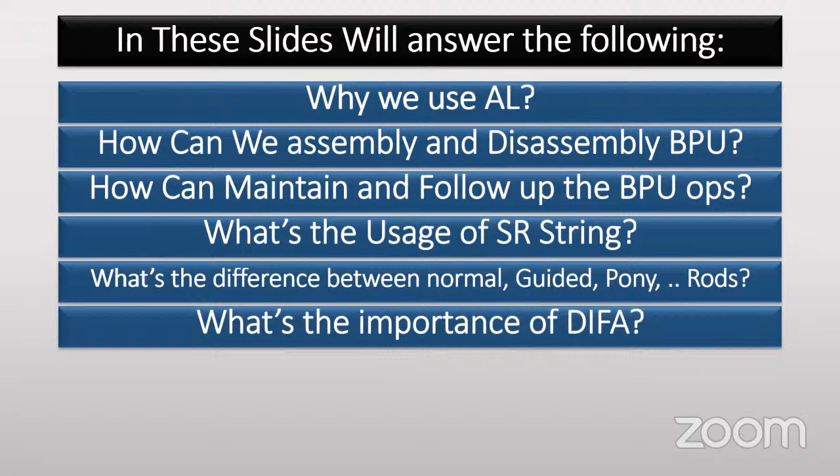These slides will answer the following questions: why we use artificial lift; how can we assemble and disassemble a beam pumping unit; how can we maintain and follow up beam pumping unit operation; what is the usage of sucker rod string; what is the difference between normal, guided, and any other type of rods; what is the importance of DIFA done on downhole pump in the workshop; how can we design a sucker rod system; and how can we optimize our production by sucker rod system.

The first question: why we use artificial lift? As we know, we need to first know the types of oil wells. The first type is self-flow wells. This well has the capability of flowing naturally from reservoir till surface facilities because these wells have a high reservoir pressure. The second type is non-self-flow wells, which cannot flow naturally because of low reservoir pressure or depleted well.

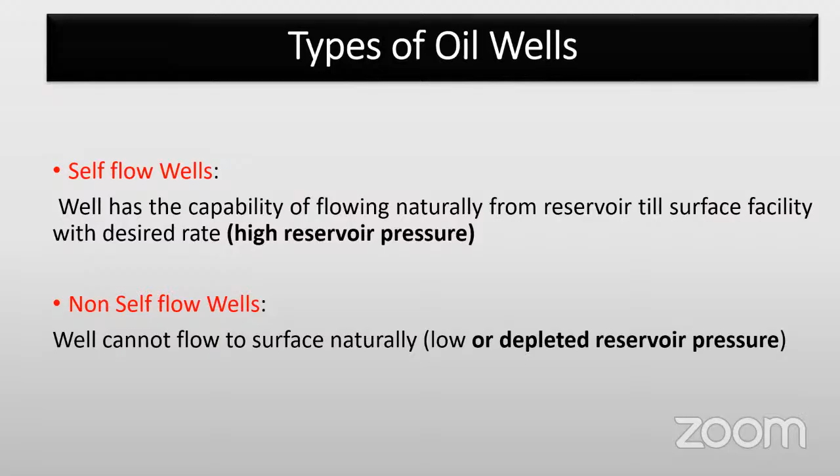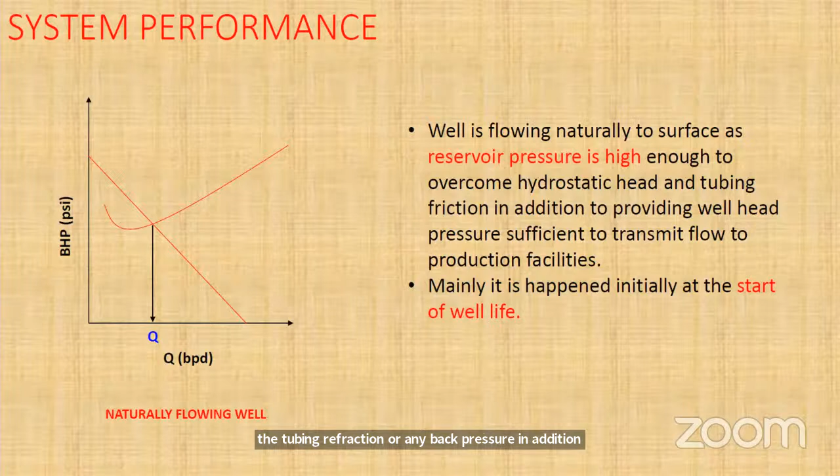As we know, the intersection between vertical lift performance and the IPR means the naturally flowing well. This well can flow naturally at this flow rate at this bottom hole flowing pressure. This will flow naturally to surface as the reservoir pressure is very high enough to overcome hydrostatic head and tubing friction or any back pressure, in addition to providing us with well head pressure. This well head pressure has to be sufficient to transmit the flow to production facilities.

This mainly happens initially at the start of well life, but after time, the well which is producing naturally will lose that intersection and become a dead well.

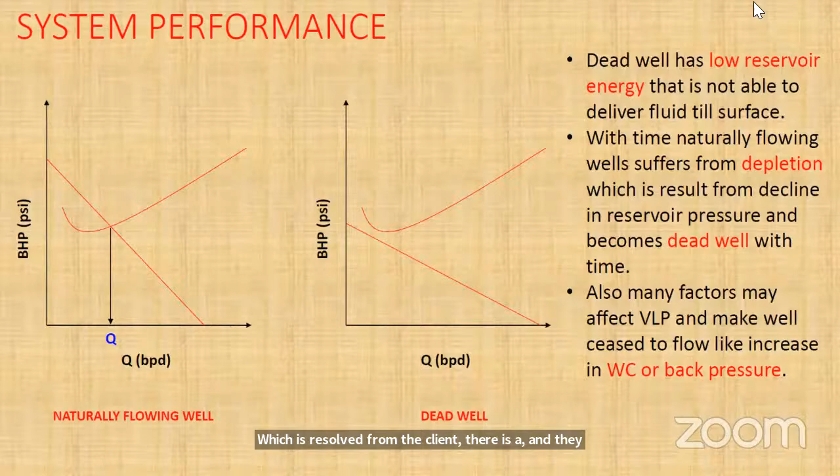This dead well has low reservoir energy that is not able to deliver fluid to surface. With time, naturally flowing wells suffer from depletion, which results from decline in reservoir pressure, and become dead wells. How can we retrieve this dead well to flowing well again?

The first thing is to enhance or support the reservoir pressure and improve the IPR. How can we support the reservoir pressure? By injection, any type of injection: water injection, PWRI, gas injection. The objective of all these types of injection is to support the reservoir pressure.

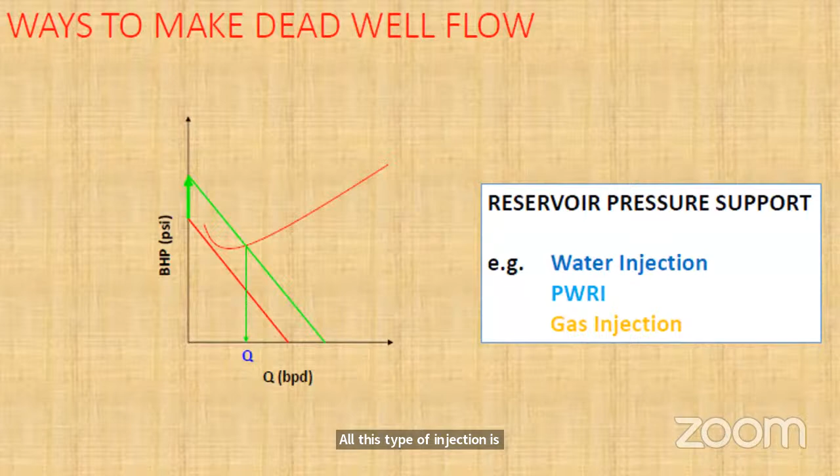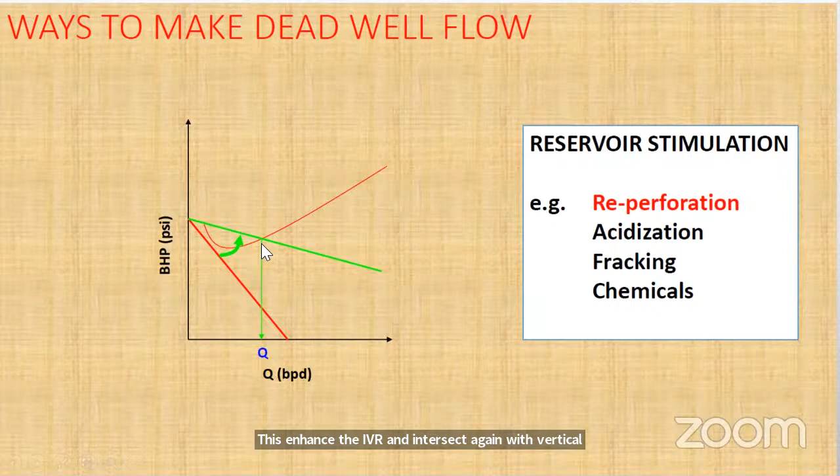We can make reservoir stimulation to enhance the IPR so it intersects again with the vertical lift performance. How can we make reservoir stimulation? By reperforation, acidization, fracking, or any type of chemical injection. This enhances the IPR and intersects it again with vertical lift performance, so this well can flow naturally again at this flowing rate and bottom hole pressure.

But if we enhance the IPR and still the intersection between IPR and vertical lift performance is not achieved, what do we do? We force it by using artificial lift - any type, like gas lift, ESP, sucker rod, jet pump - which will bring the intersection again between vertical lift performance and the IPR. This intersection means the well will produce again.

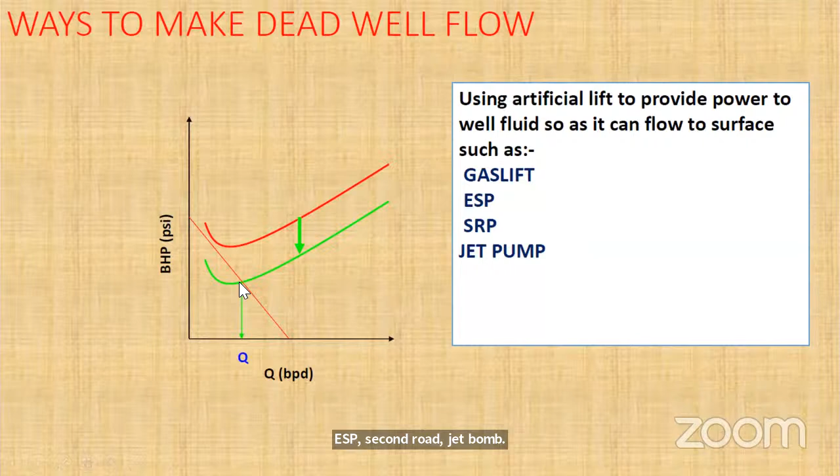What is the objective of artificial lift? The main objective is to apply drawdown to give the fluid energy to overcome hydrostatic head and tubing friction, and give us flowing pressure at the surface. This pressure will transmit the fluid to the process facilities.

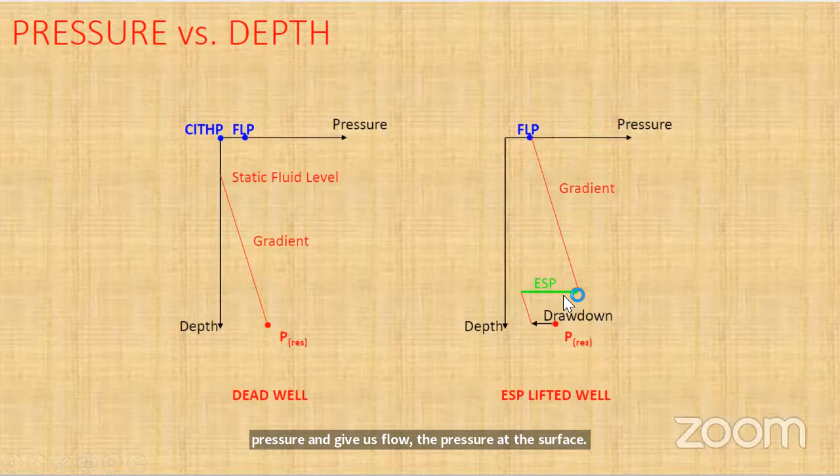Here, the reservoir pressure is very low, giving us a static fluid level, and the fluid stops at this point. So we need energy to overcome this pressure and give us flowing pressure at the surface. The artificial lift creates drawdown and supports the fluid with energy, which overcomes the hydrostatic head and tubing friction, giving us flowing pressure.

Now we answered the first question, why we use artificial lift. The second question: how can we assemble and disassemble a beam pumping unit? This will be discussed in detail during the course, but I will give you an overview of how we can assemble and disassemble a beam pumping unit.

First, we have to know the parts of the beam pumping unit. What is the main part? The main part is the concrete base, then the steel base of the beam pumping unit, which assembles all parts above this unit base. This is the prime mover.

The prime mover is the source of rotational movement, which is transmitted to the gearbox by V-belts. These V-belts and the prime mover generate the rotational movement. Then this movement transmits to the crank arm and the Pitman arm. The crank arm and Pitman arm are attached together with the crank pin. These two arms are responsible for transferring the rotational movement into up and down strokes.

Attached here is the equalizer. This equalizer attaches with the walking beam by the equalizer bearing. Here is the center bearing, which attaches with the walking beam to transfer this up and down stroke to the downhole equipment. This is called the Samson post with 3 legs.

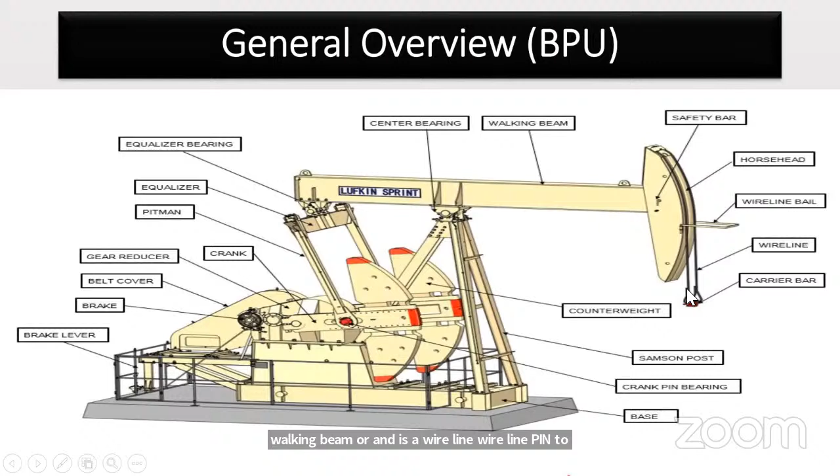This walking beam, horse head, and wireline bail attach to the carrier bar, which loads the sucker rod string on the carrier bar. So these are the main parts of the beam pumping unit, which will be assembled.

How can we assemble the beam pumping unit? What is the main objective of the beam pumping unit? It is responsible for transferring the rotational movement into up and down stroke to produce the pump. The pump needs up and down movement to produce. So this is the source of the up and down stroke.

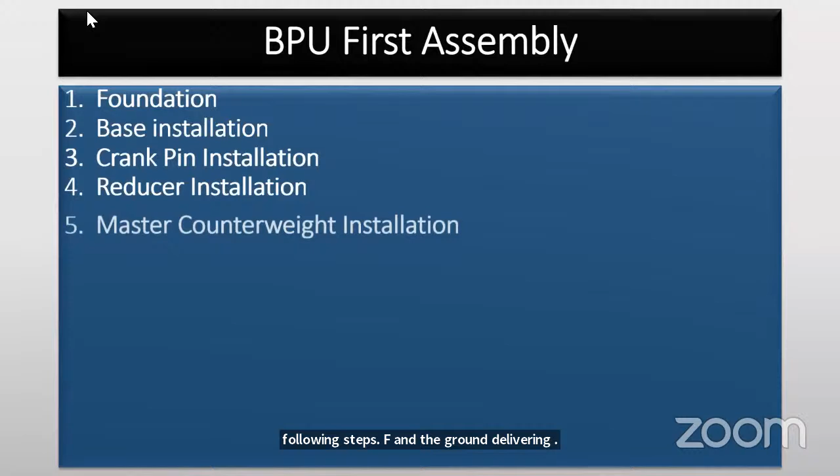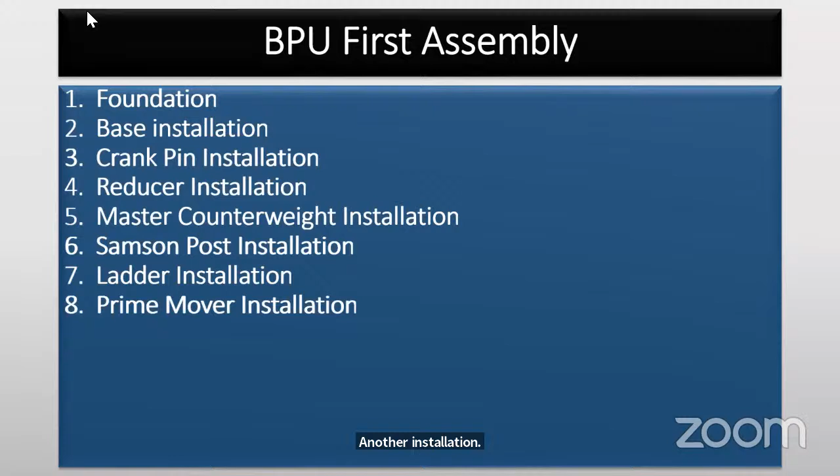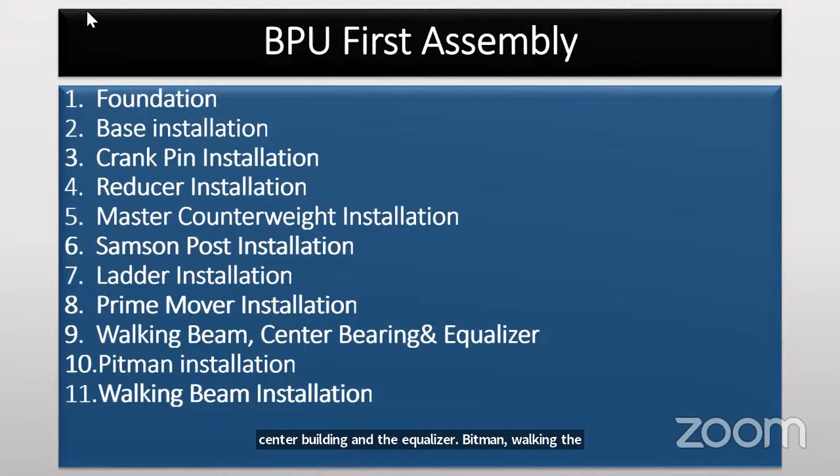Beam pumping assembly will be done in the following steps: foundation and ground leveling, base installation, crank pin installation, reducer installation, master counterweight installation, Samson post installation, ladder installation, prime mover installation, walking beam center bearing and equalizer installation, Pitman installation, the whole walking beam equipped with horse head, center bearing and equalizer bearing, horse head installation, and finally crank guard installation for safety.

This is the complete assembly for the beam pumping unit, which will be discussed in detail during the course - how we can assemble it from A to Z.

The third question: how can we maintain and follow up the beam pumping unit during operation? The maintenance and follow-up for beam pumping unit is classified into 3 major steps. The first one is daily, monthly, and every 6 months, depending on the most important 3 words: look, listen, and apply.

We will begin with daily. Look at the unit on a daily basis to observe any change in the unit alignment, any wireline tracking, or anything else changing during the last 24 hours. Listen - we have to really listen for any noise from the gearbox or structure bearing: rumbling, popping, clicking.

Any noise from the beam pumping unit is an indication of beam pumping unit failure. Apply the brake slowly but firmly to assure it is in good working condition. This is for safety, because if we want to make any maintenance for the beam pumping unit, we will use the brake.

Monthly, we repeat the most important words: look, listen, and apply, which is done daily, and check the oil level in the gearbox to ensure it is at the proper operational level. Review all bolt conditions visually.

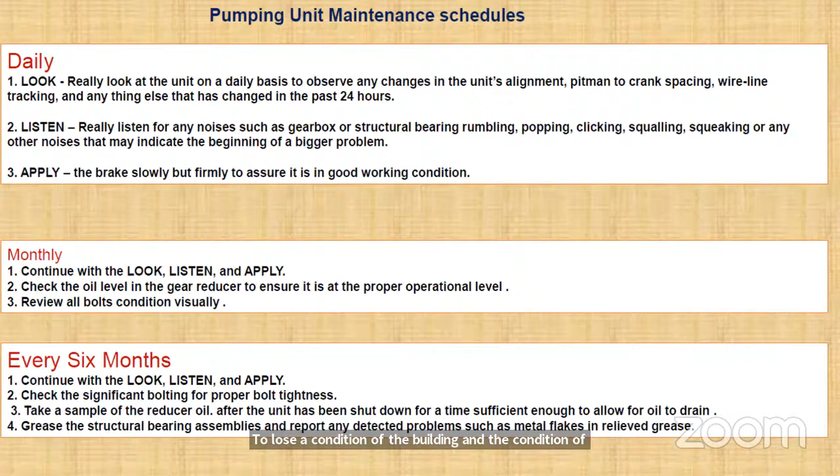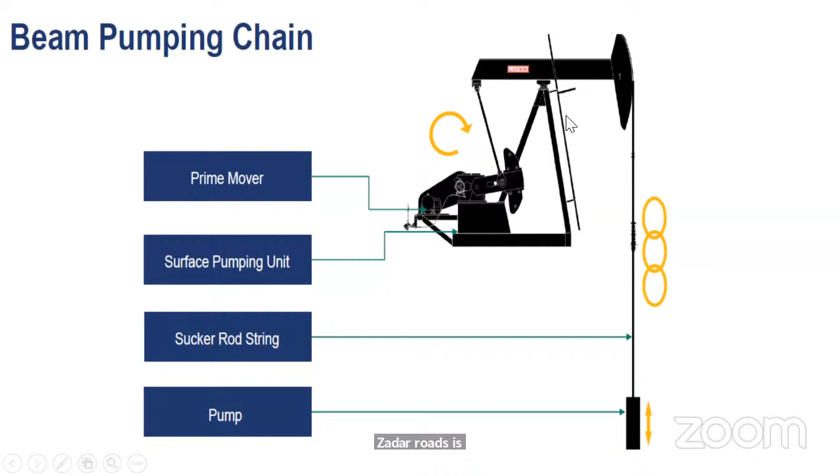Why do we use the sucker rod string? As I said before, this pump needs up and down stroke to produce. The up and down stroke is generated from the beam pumping unit at surface. The sucker rods are responsible for transmitting this up and down stroke from the beam pumping unit at surface to the downhole pump downhole. This is the figure or shape of the sucker rod. This part is responsible for transmitting the energy from the beam pumping unit to the downhole pump, acting as the chain between the beam pumping unit at surface and the downhole pump downhole.

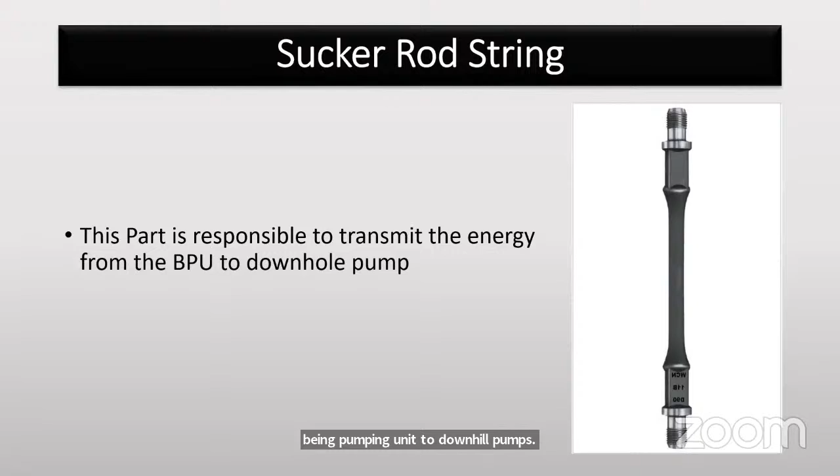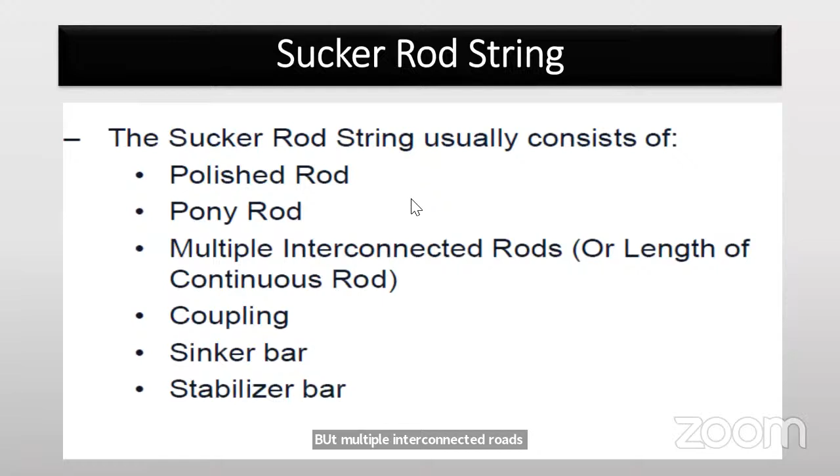The sucker rod string consists of the following, from surface to downhole: polished rod, pony rod, multiple interconnected rods, coupling, sinker bar, stabilizer bar, and at the end, the downhole pump.

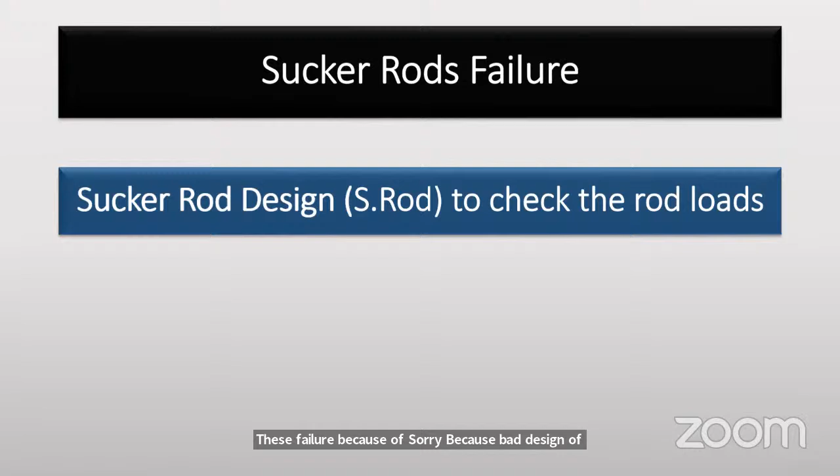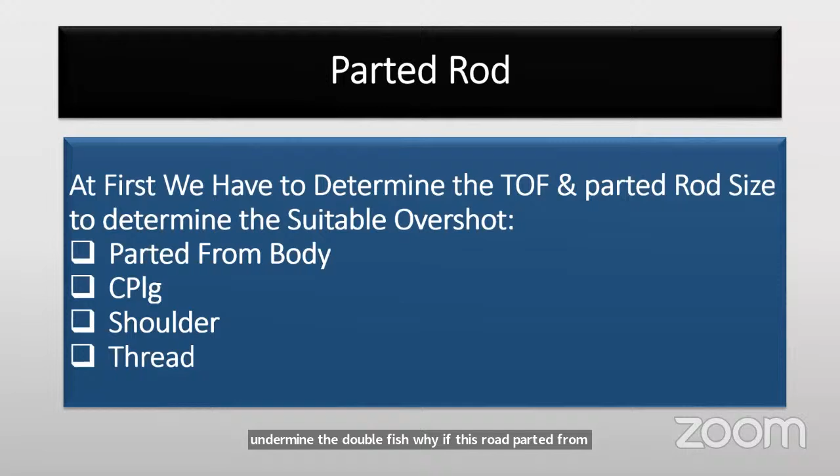Sucker rod failure will also be discussed during the course, which occurs during operation. This failure is because of bad design of the sucker rod, in terms of checking the rod loads. The most common failure is rod parting. When a rod is parted, we first have to determine the top of fish, because we need to determine the parted rod size to determine the top of fish - whether this rod parted from the body, from the coupling, from the thread, or shoulder - to determine the suitable overshot.

Sucker rod care and handling will be discussed in detail during the course, because it affects the lifetime of the sucker rod and is the main cause of rod failure.

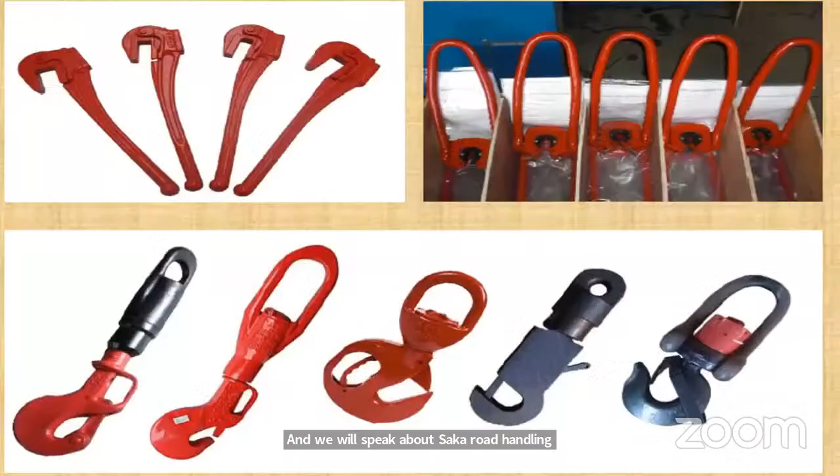We will also speak about sucker rod handling tools. These handling tools are API standard handling tools which will be used during running in hole or pulling out of hole with sucker rods. They have to be as per standard to prevent any failure of the sucker rods.

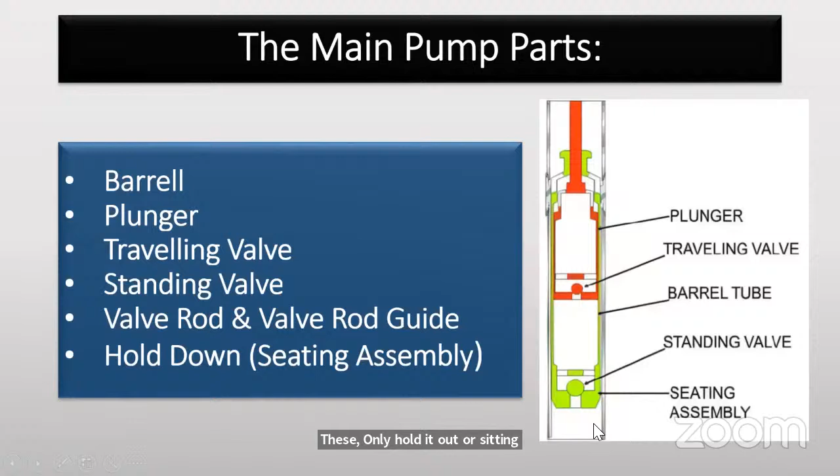Downhole pump. The main parts of the downhole pump are the barrel. This barrel is attached at the end with the standing valve, and the traveling valve which is attached with the plunger, responsible for transferring the oil from the barrel to the tubing. This is called the traveling valve, and this is called the standing valve. This valve rod, hold down, or seating assembly is responsible for holding the pump inside the tubing.

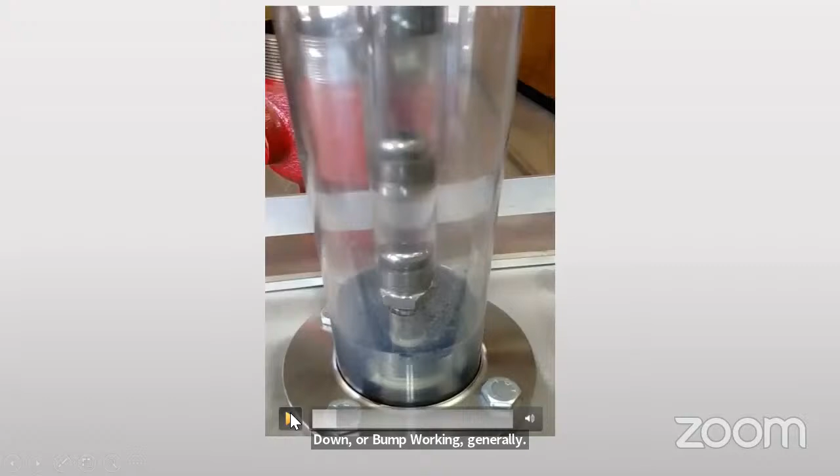This video will show us how the downhole pump, or sucker rod downhole pump, works generally - first in the upstroke, then the downstroke. In the downstroke, as shown here, the traveling valve is in the open position and the standing valve is in the closed position, to transfer the fluid from the barrel to the plunger. But in the upstroke, the opposite happens: the standing valve is in the open position and the traveling valve is in the closed position. This open position transfers the oil or fluid from downhole into the barrel. This action is repeated to produce via the downhole pump.

I think it's clear now how the downhole pump is working.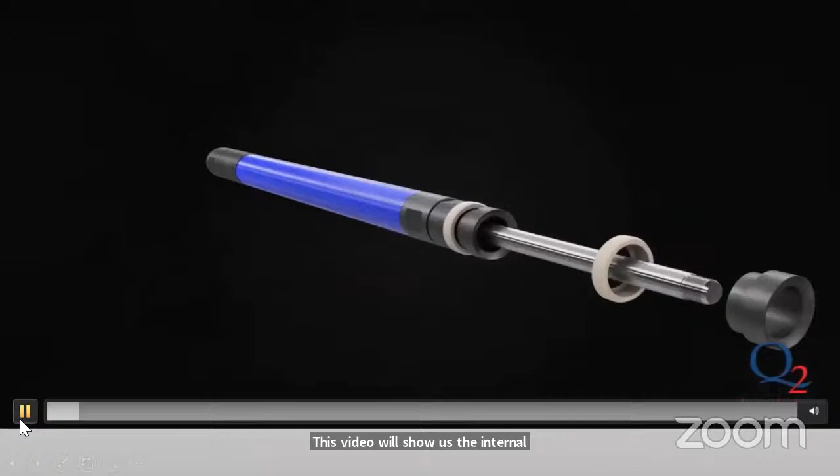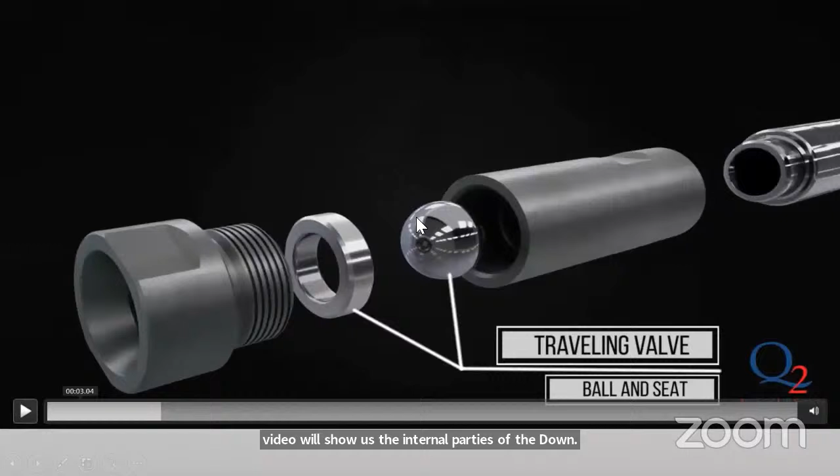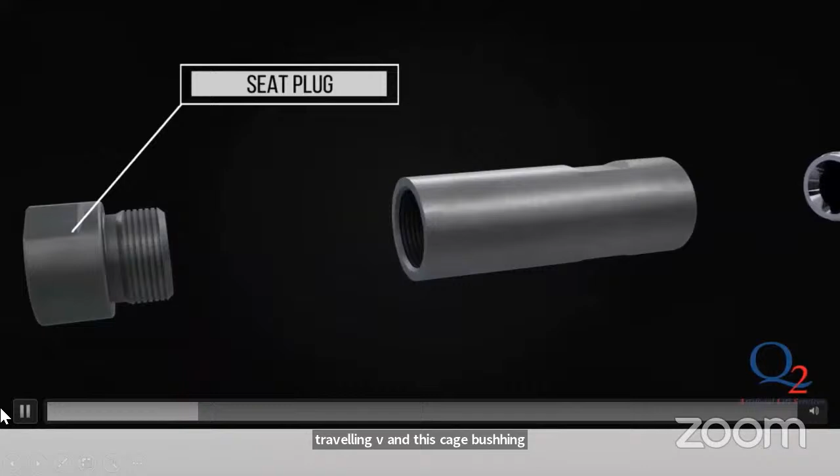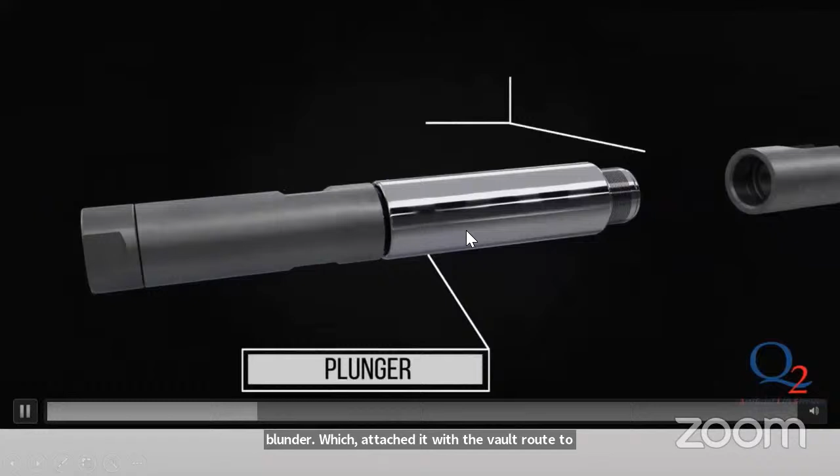This video will show us the internal parts of the downhole pump. This is called the traveling valve, and this is the ball and seat of the traveling valve. This is called the cage of the traveling valve, and this is the cage bushing. The traveling valve is normally attached to the plunger, which is attached to the valve rod, to move up and down. This is called the plunger. This part is the valve rod, which will transfer the up and down stroke from the sucker rods to the plunger inside the barrel.

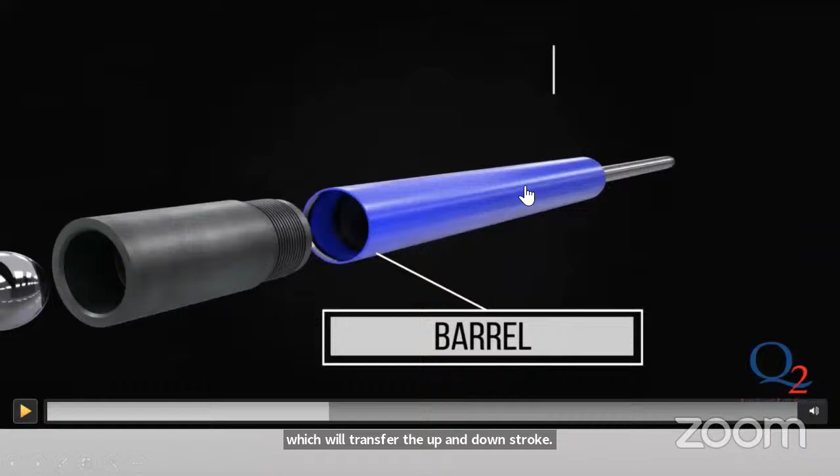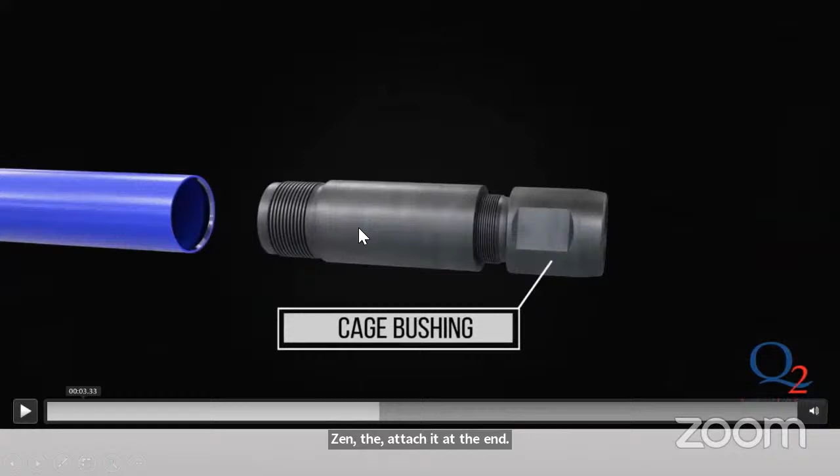Then the barrel is attached at the end with the standing valve. This also consists of ball and seat, and the cage bushing, which will attach with the barrel at the end.

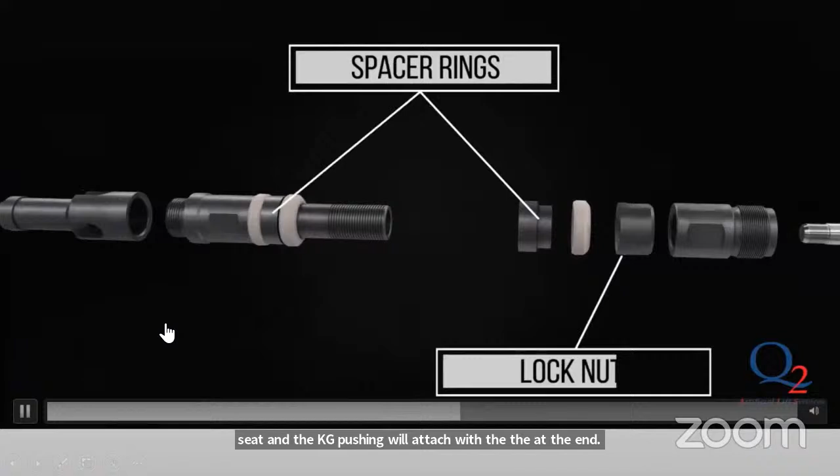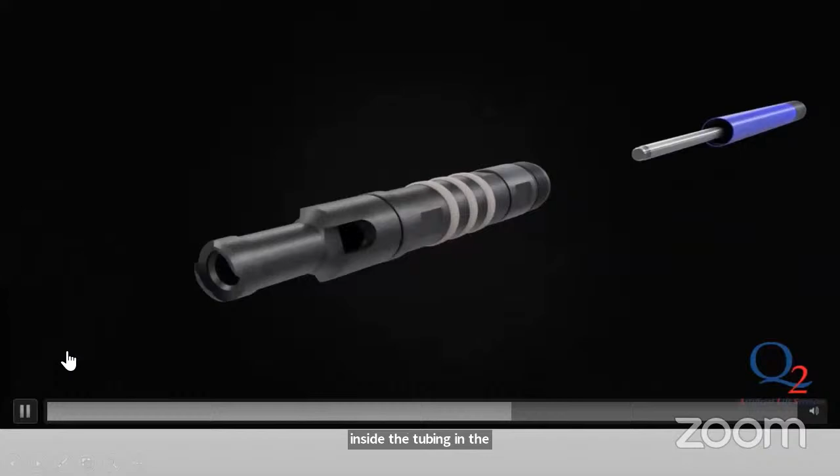This is hold down, which is responsible to seat the pump inside the tubing in the pump setting nipple. This type is called the cup type. This part will attach with the pump in the barrel at the top, this is called the valve rod bushing. This reciprocating movement will be transferred by sucker rods.

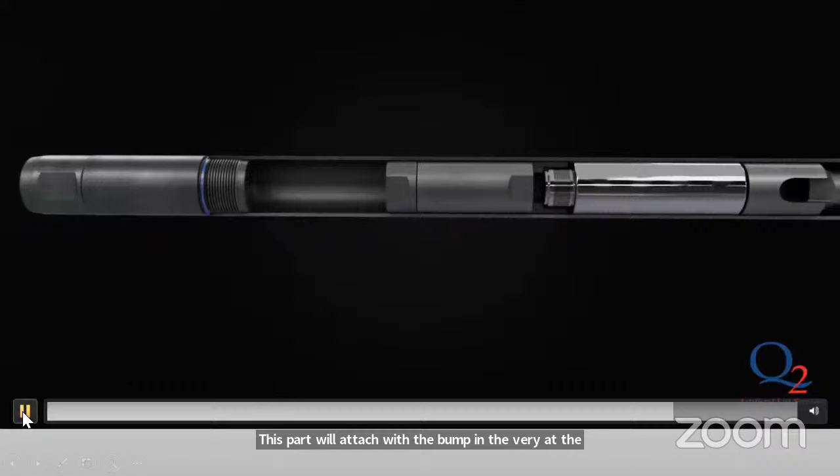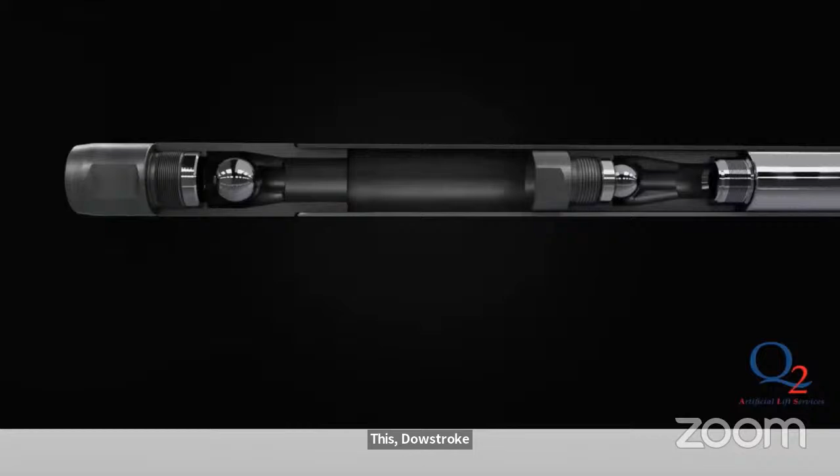Now we will show how this pump is working. This downstroke and upstroke movement is called the standing and traveling valve.

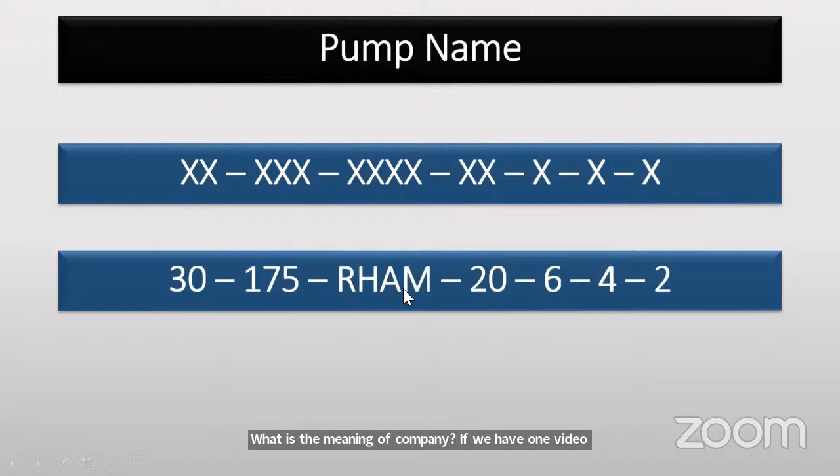What is the meaning of pump name? If we have a pump name called 30-175 RHAM 20-6-4-2, what is the meaning of this name? Every pump has a name. The first two numbers here...

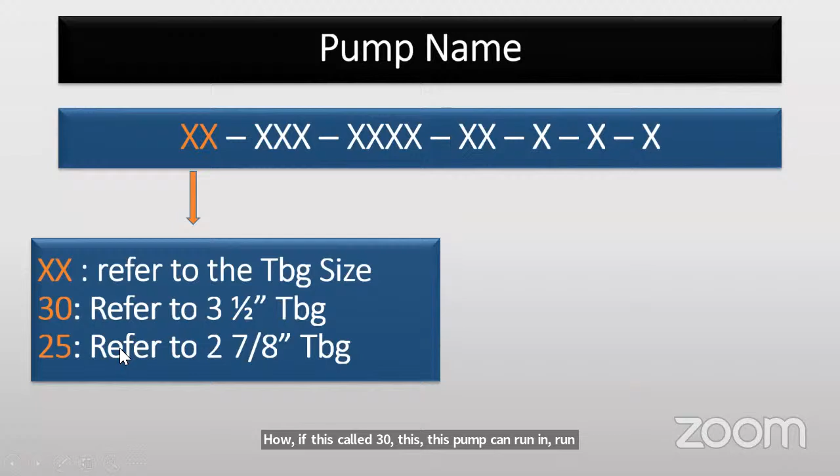If it's 30 or 25, this refers to the tubing size which this pump can run in. If it's called 30, this pump can run inside tubing size 3.5 inch. If this number is 25, this pump can run inside the 2 7/8 inch tubing.

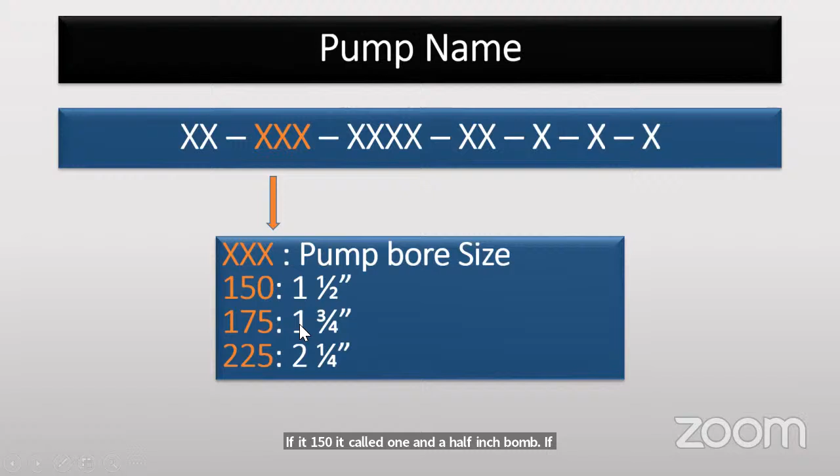The second number is 150, 175, 225, and so on. This is called the pump bore size, the pump size itself, and this will affect the well production and the pump production. If it's 150, it's called a 1.5 inch pump. If it's 175, it means a 1 3/4 inch pump.

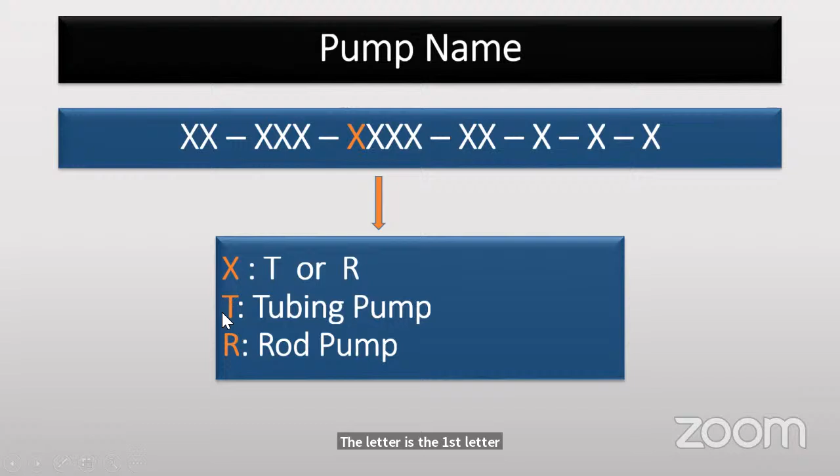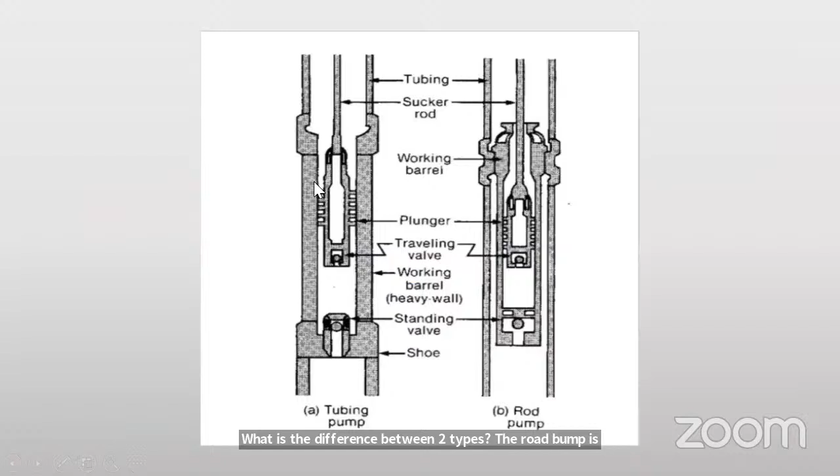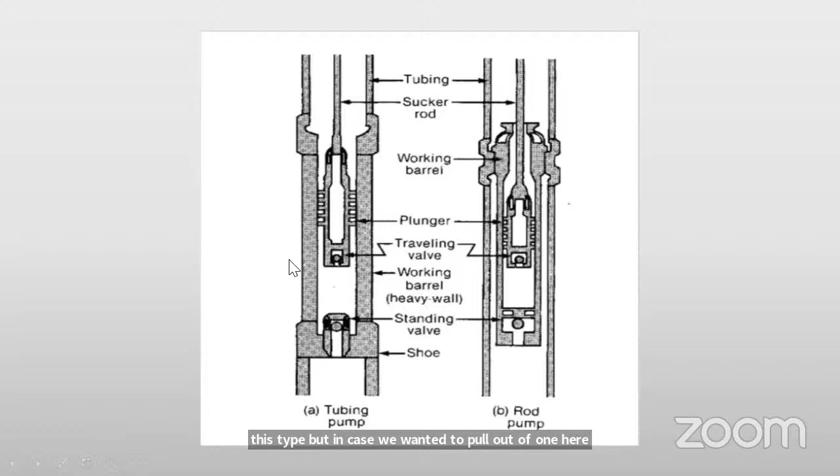The first letter here may be T or R. T for tubing pump, R for rod pump. What is the difference between the two types? The rod pump is installed inside the tubing, but the tubing pump is a part of the tube. So it will give us a huge production compared with this type. But in case we wanted to pull out of hole, with the rod pump we can pull out of hole only with the downhole pump. But with the tubing pump, we will pull out of hole with all the completion string to replace.

The second letter is W or H. W for thin wall barrel, H for heavy wall barrel. It will be discussed in details when we use the thin wall barrel and the heavy wall barrel.

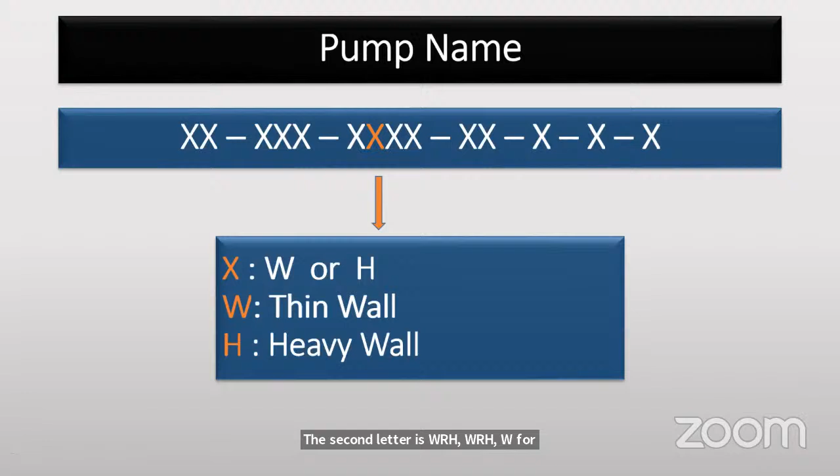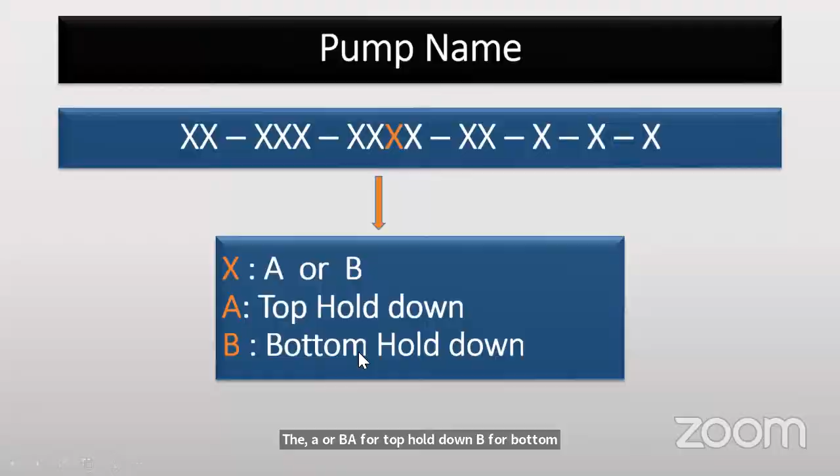The third letter here is A or B. A for top hold down, B for bottom hold down. What is the meaning of top hold down and bottom hold down? If the pump is sitting from the top of the pump, it is called the top hold down. If the seating is at the bottom of the pump, this is called bottom hold down.

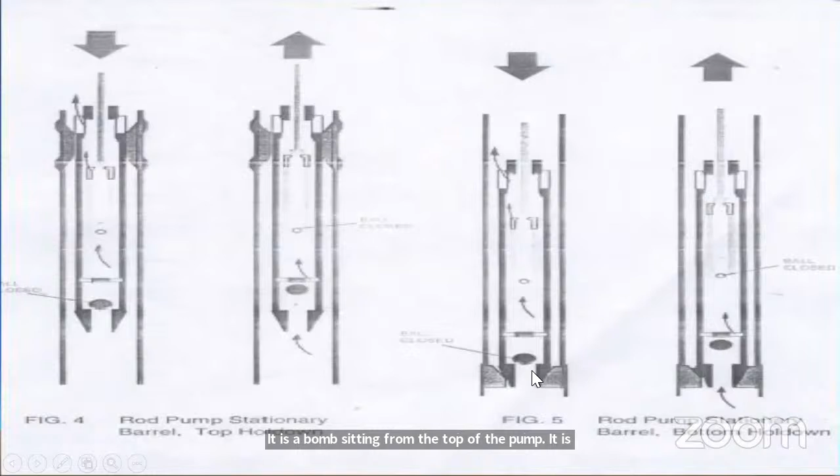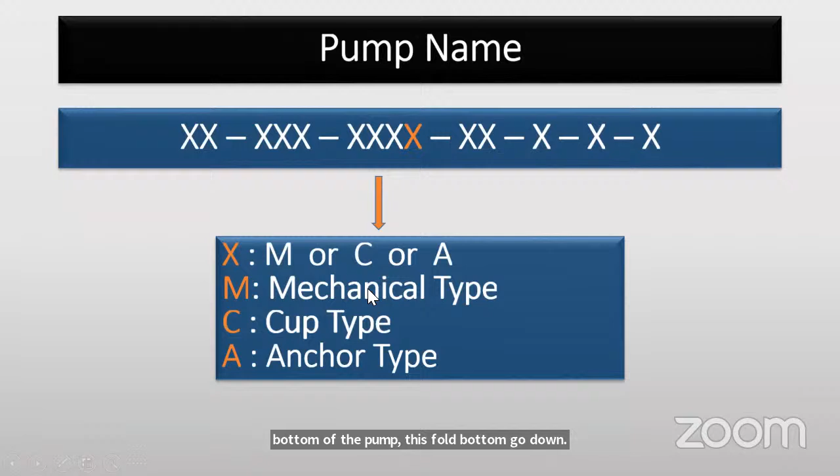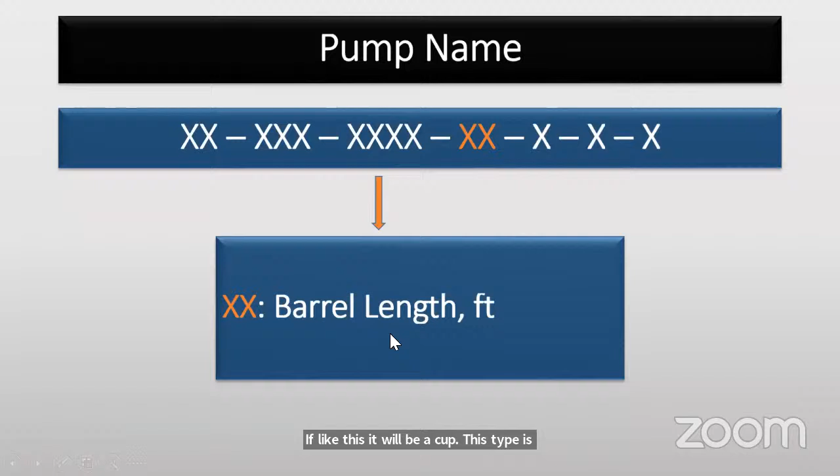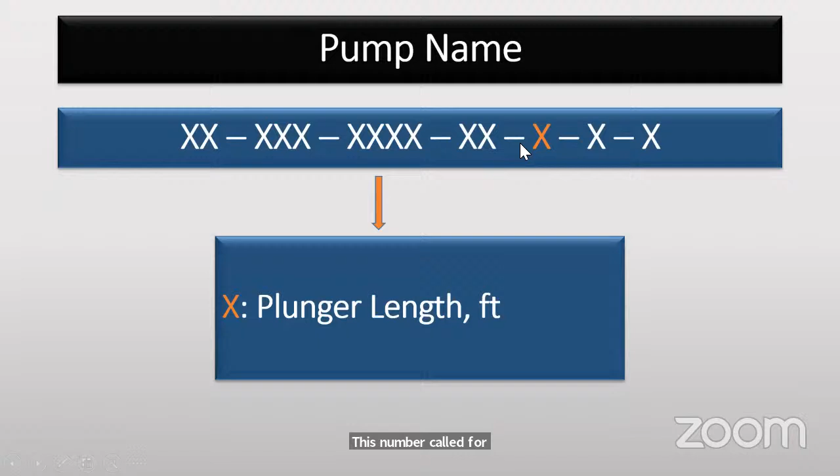This number is for barrel length. What is the barrel length? Every pump has a barrel length, measured in feet. This number is called the plunger length, the plunger which will move inside the barrel. What is the length of the plunger? This is the plunger length in feet.

The last two numbers are for extension length, and we will discuss it in details. What is the meaning of extension length and how does it affect the pump production?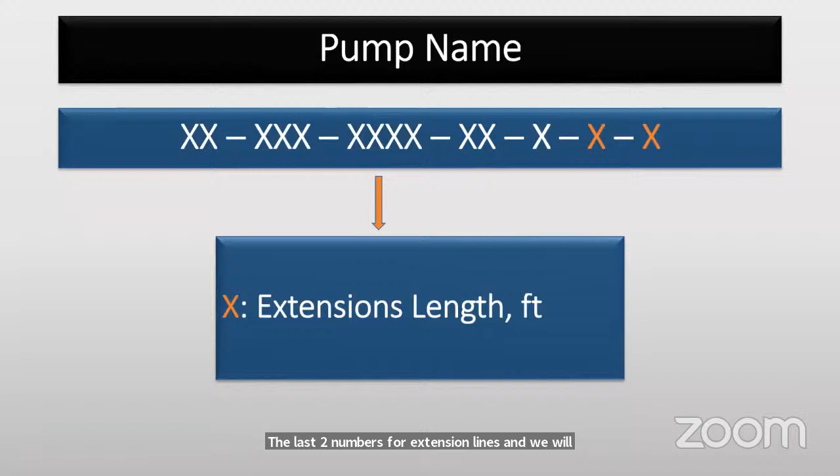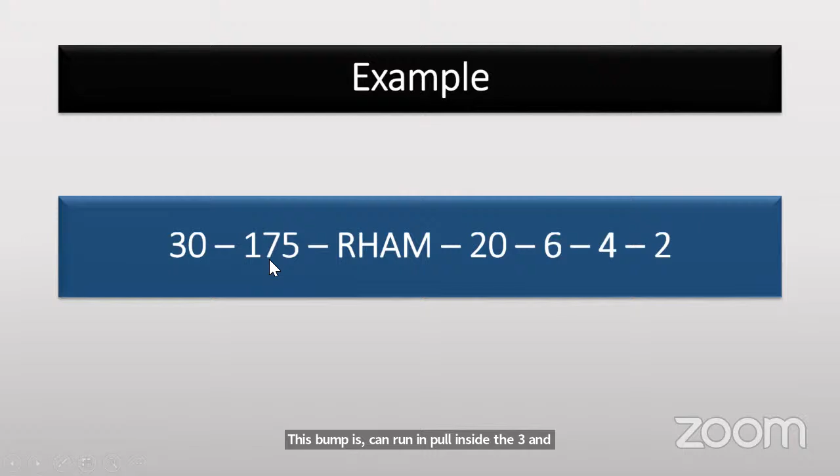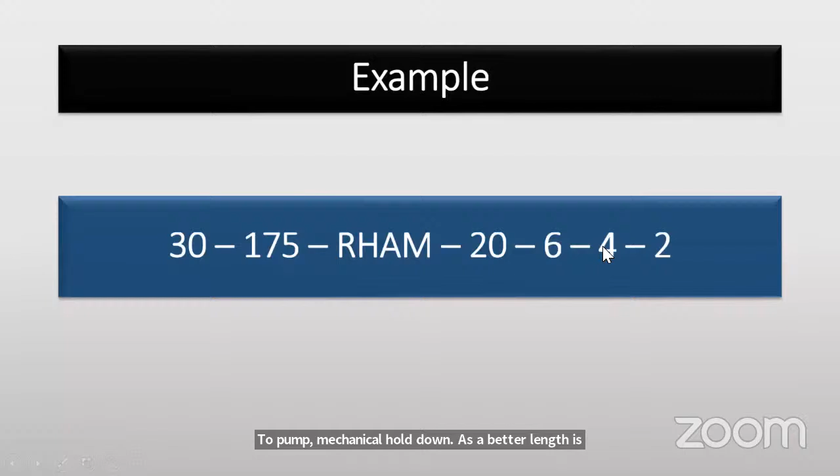For example, this pump is 30 175 RHAM 20-6-4-2. This pump can run in hole inside 3.5 inch tubing. 175, the pump size is 1.75 inch pump. R for rod pump, heavy wall barrel, top pump, mechanical hold down. The barrel length is 20 feet, plunger length is 6 feet. There are two extensions, one is 4 feet and the other is 2 feet.

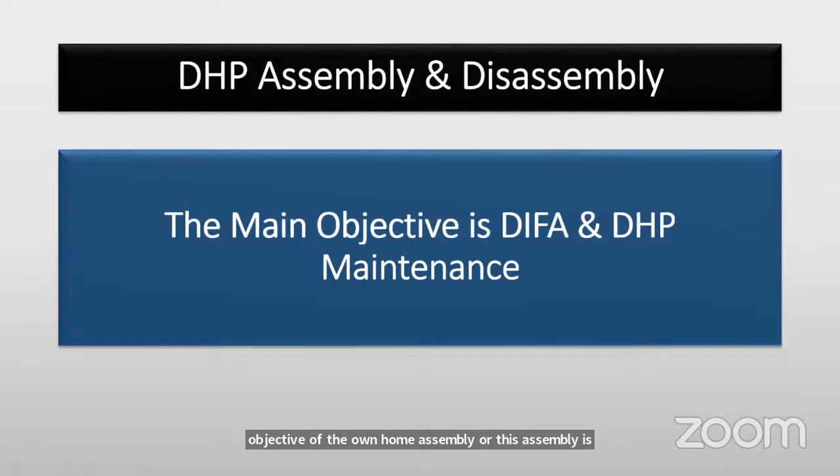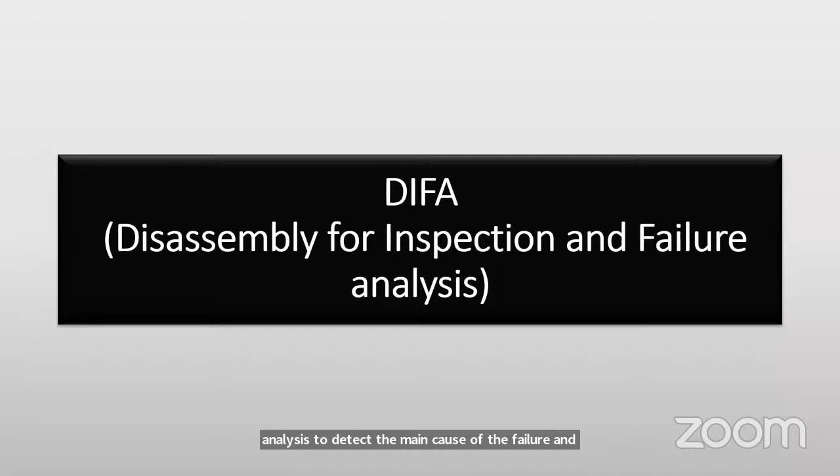Downhole assembly and disassembly. The main objective of downhole assembly or disassembly is for downhole pump maintenance or for DIFA. DIFA is disassembly for inspection and failure analysis, to detect the main cause of the failure and replace the damaged parts that need replacement, to run in hole again with the downhole pump.

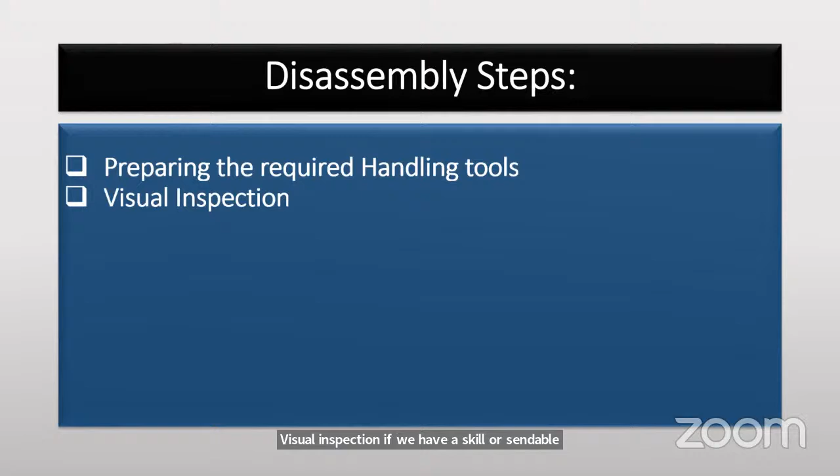The disassembly steps: preparing the required handling tools. Every sucker rod workshop has handling tools for DIFA. Visual inspection, checking if we have scale or sand production on the outside of the pump. Clean all components before inspection.

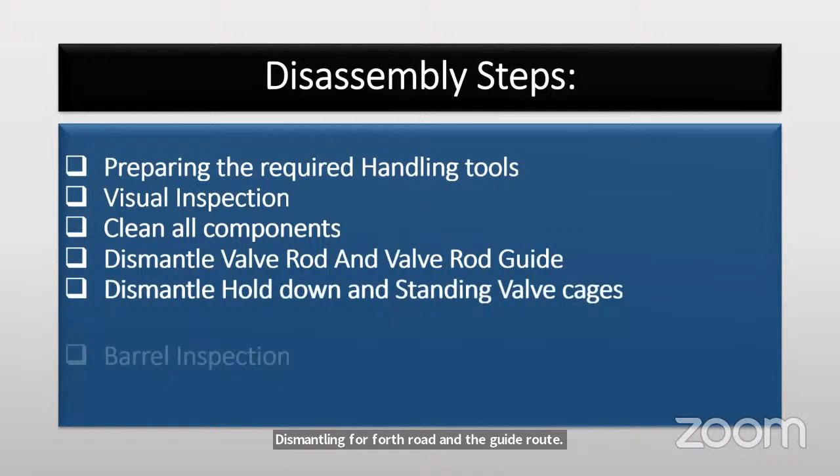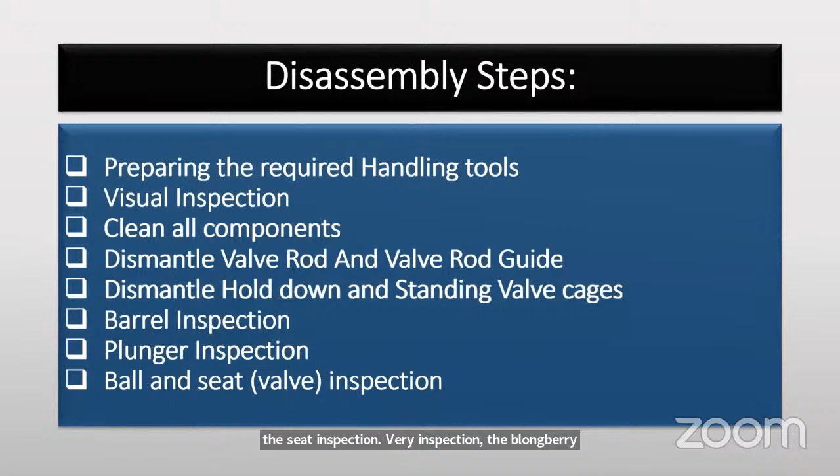Dismantling the valve rod and the valve rod guide, then the hold down and standing valve cage. Barrel inspection, plunger inspection, and ball and seat inspection. These inspections need special devices to complete the DIFA.

How can we design a sucker rod? This is the most important question, because we need software like S-Rod, which is provided by a service company. This sucker rod design is used to select the suitable pump and the desired production rate, and to select suitable rods and the rod loads.

Select the required beam pumping unit based on maximum torque and maximum load for this well. Determine the stroke length and strokes per minute for the operation to produce the desired rate. This software will be discussed in details during the course, how to design the sucker rod from A to Z, from the beam pumping unit, for the sucker rods, for the downhole pump, by selecting the desired rate, stroke per minute, and stroke length.

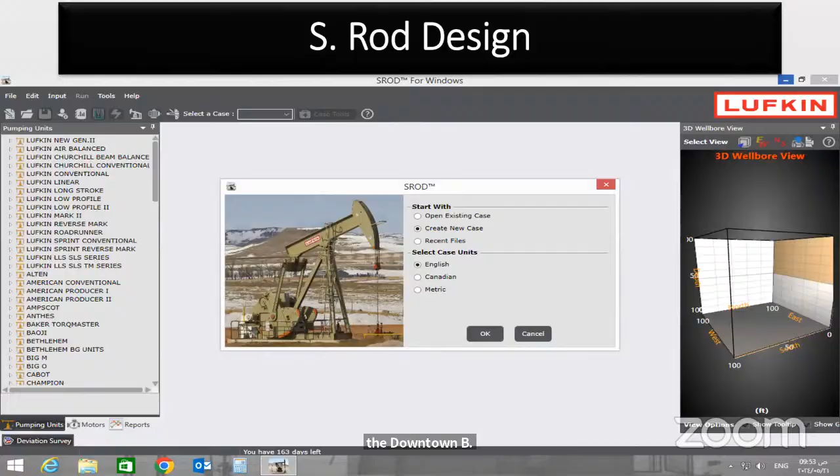Also, downhole card interpretation. What does the downhole card want to tell us? This card gives us the first indication of downhole problem and condition. This will differ for interpretation, and it needs to tell us we have a problem downhole. What is the problem? What does this card mean, and what is the difference between every card?

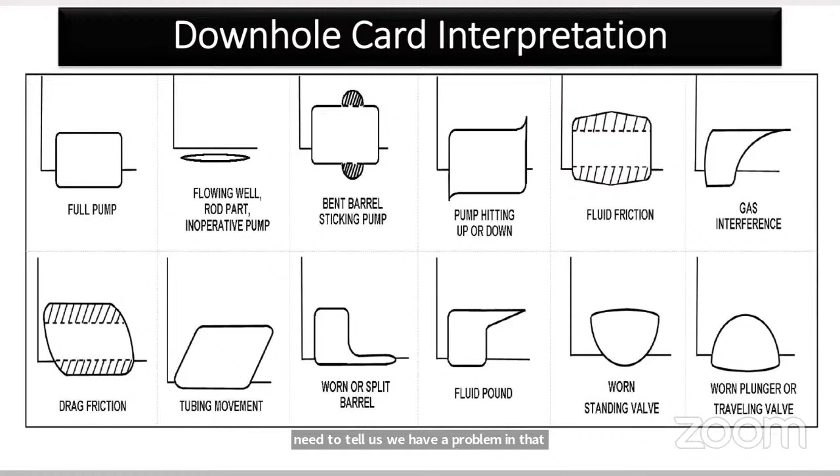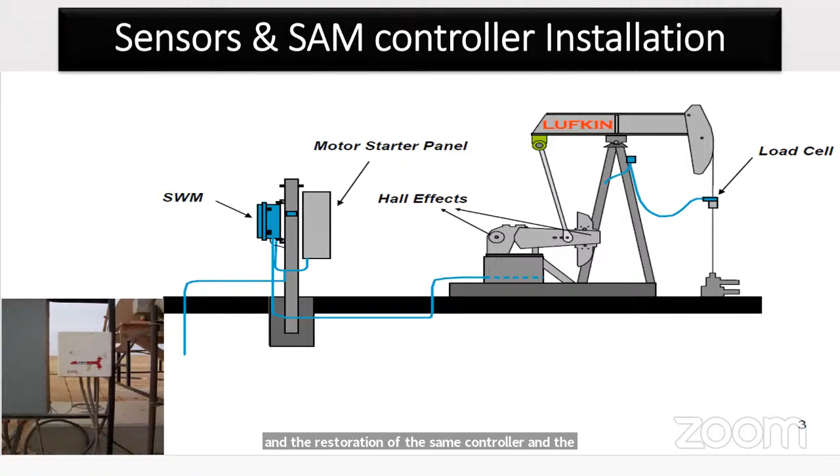We will speak also about sensors and the SAM controller, and the installation of the SAM controller and the sensor on the beam pumping unit, which will give us the downhole cards and will help interpret the downhole problem. At the end, how can we optimize our production?

The beam pumping unit depends mainly on this equation, pump displacement, which is called PD. This gives us the barrel per day. D is for plunger size or the pump size, N is for pumping speed in strokes per minute.

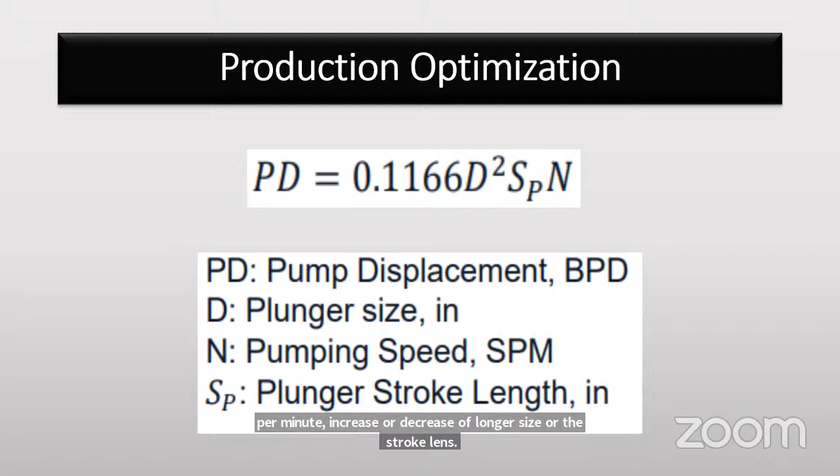So this equation gives us the first indication of how to optimize our production using a sucker rod pump, by changing or replacing the existing pump with another size, or increasing or decreasing the stroke per minute, the plunger size, or the stroke length. All these actions will be discussed in detail, especially how to change the stroke per minute and the stroke length.

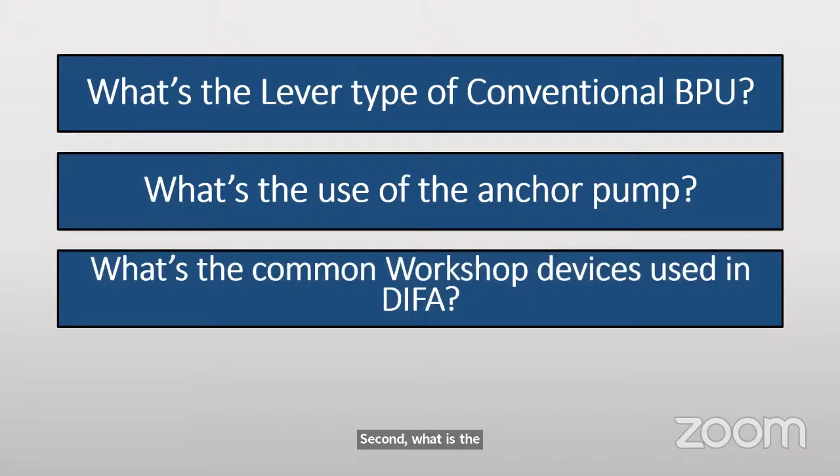So I wanted to ask you some questions to think about. First, what is the lever type of the conventional beam pumping unit? Second, what is the use of the anchor pump? What is the common workshop devices used in DIFA? What is the main use of the sinker bar and the stabilizer bar in the sucker rod string?